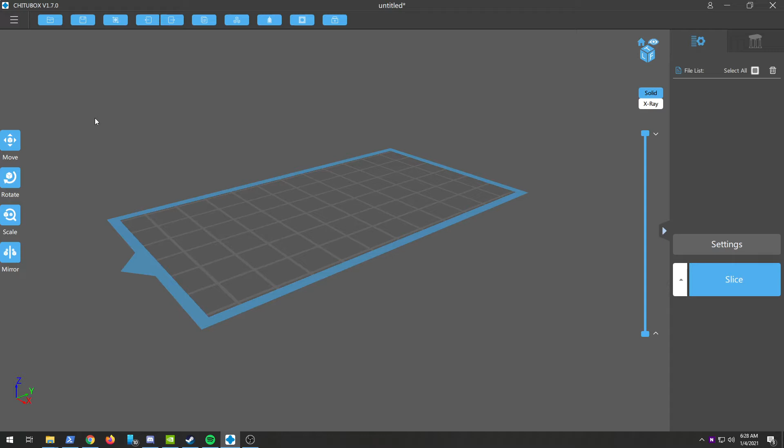Alright, I just got my LD-002R last week, so I'll run through the basics of this real quick about how to use it, what the basics are. So when you start, there is a newer version available than what is on the thumb drive that it comes with. It's 1.7.0 at the time. Go download that from their website. Both of them are going to have the LD-002R on there, but you know you want to have the newer versions of everything, right? So you fire it up for the first time.

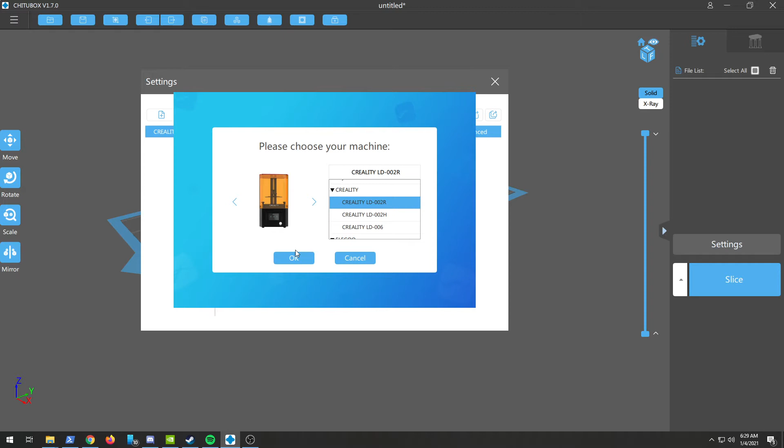You're going to need to go into settings and set up your printer profile. So we can either do that with settings here or settings right here. So it will have a generic printer under the profiles. We're just going to click remove printer, get rid of it, and then we're going to click add a new printer. We're going to come into this list and select the Creality LD-002R. Click OK. So that's going to create your printer in the settings.

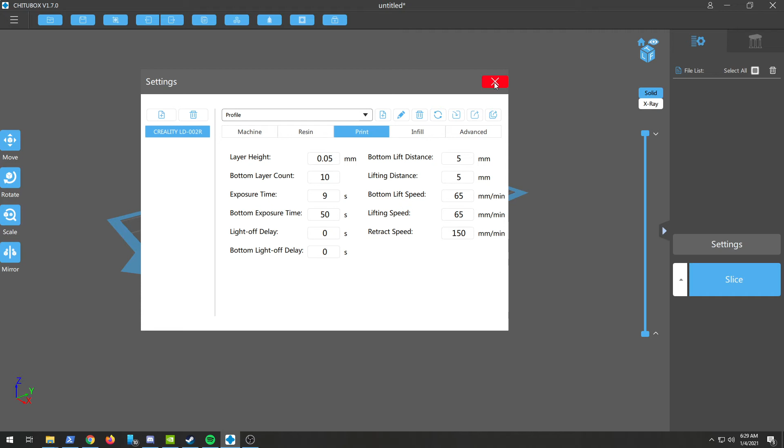It's going to give you your resolution for your screen. It's going to give the print size area for the build plate, general settings on resin. It's going to create the exposure times, the layer height, the lift distance, all these things that you don't want to tinker with. It's just set up by manufacturer's recommendations by default, so we leave it. So add your printer, you're ready to go.

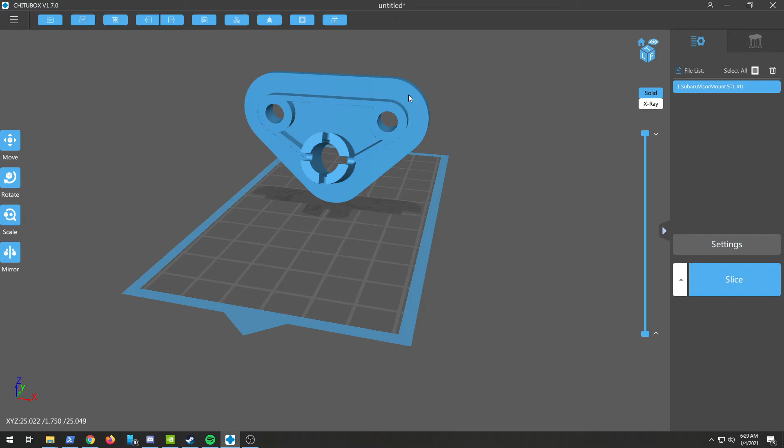Next, we're going to add that STL you've downloaded to your print area. In this case, I'm going to do this little Subaru visor mount right here. Click open. It's going to drop it on the area. Now, if it's too big as it sits, you'll see overhangs that will turn red where they're hanging off the build plate. You can just rotate it so that you get a better fit onto the plate. And I'm going to put this right here. And if you need to scale it, there is a scale to fit option that will just make it the right size.

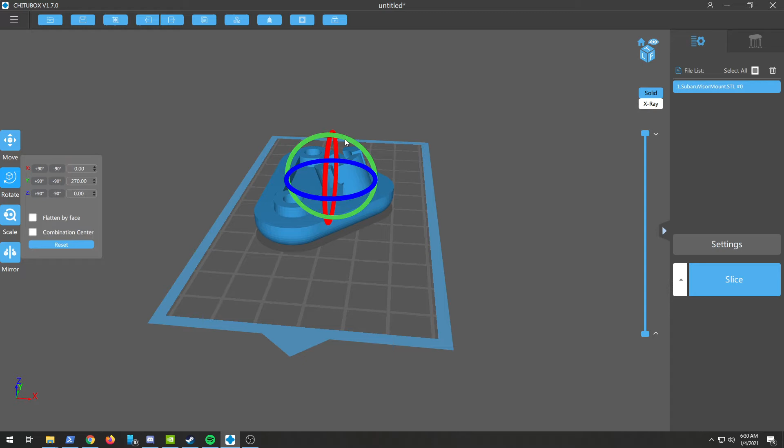So next, we're going to rotate it a little more. It's not great to print a big flat area on the resin printers because it will stick to the FEP film instead of to the build plate, and that's how you get a failed print when it breaks loose. So I'm going to take this and I'm going to rotate it up. They say about 30 degrees-ish or so, but I'm going to do it so that it fits pretty much even with the top of this line and that.

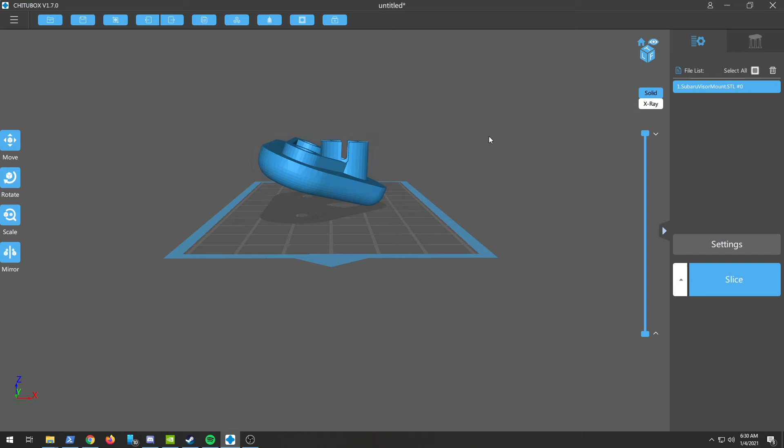Good. Okay, so resin printers do not do infill the way FDM printers and FDM slicers do. So this would be a dead solid piece if we print it as it is, and that's a waste of resin. You don't usually need to do that. So next, you're going to select your model and click up here on hollow. Set a wall thickness. I'm going to do 1.2 on this. Precision, whatever, I don't actually know what that does right now, and we're going to choose enter. And then when we click start, you'll see it run through the model and just dig out all the areas.

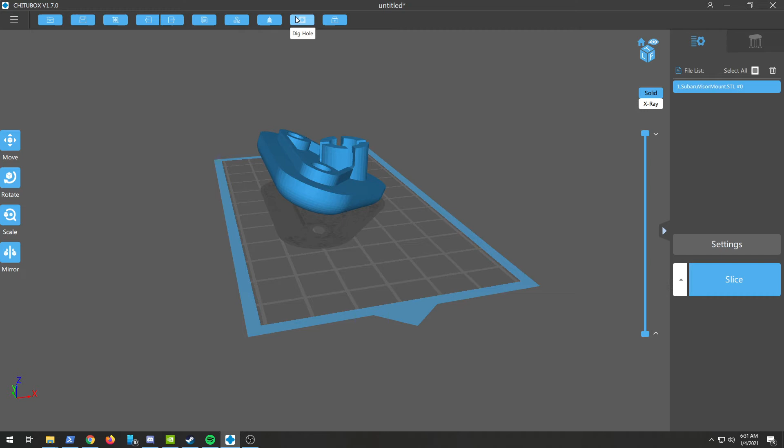Okay, so now it's hollow inside, and we need to have a way to let the resin out that's uncured and the alcohol when we wash it. So we're going to dig a hole. In this case, we'll click dig hole right here. It's going to be circle. I'm going to do 3 millimeters. I'm going to click add hole, and you'll see it turns into this little dot that you can move around.

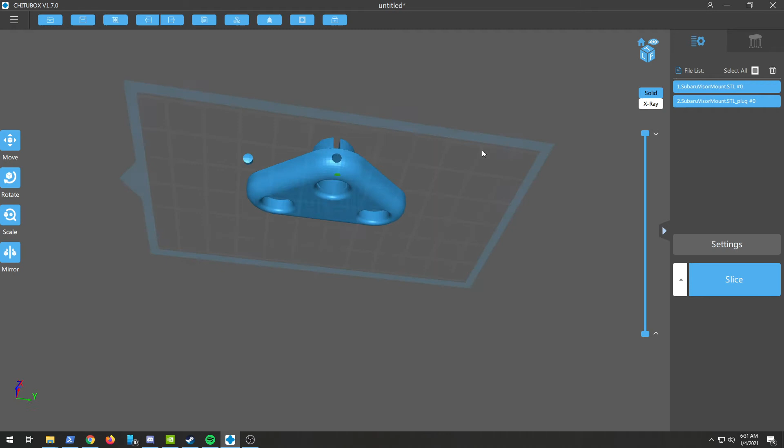So I'm going to try to put a hole right there. So I've now dug a hole out of my model. There's where resin can get out. I don't need this little fiddly bit right here, so I'm just going to click it and delete it. So now our model is hollowed and has a drainage port.

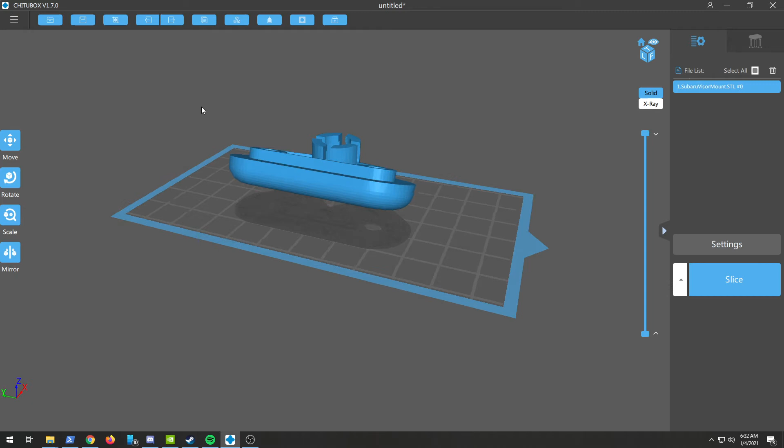You can add multiples. I'm not going to. This is going to be a finished part. I don't really want to do that with it and put holes all over it. But anytime something's hollow, you need to give it drainage.

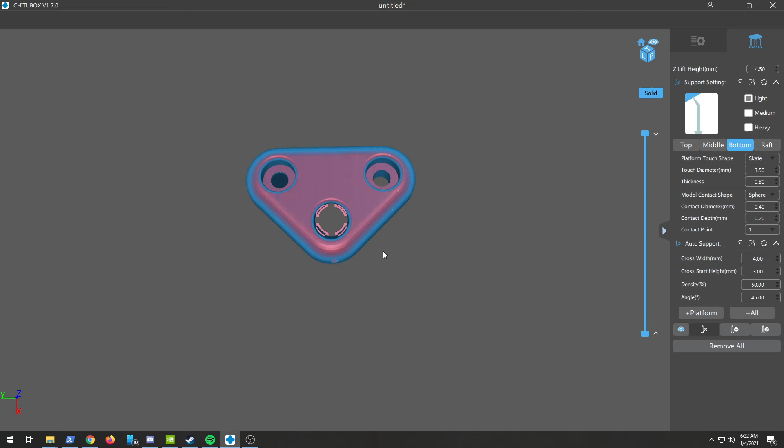So next step, we got it on our build plate. We got it sized. We got it rotated. We need to build supports. So come up here to the support menu, and you can add them manually, and some people do add them manually, but I'm not going to do that. So anything that's red means it is not touching the build plate, and it's going to need some type of support.

Here are the settings that have worked for me. So your Z lift height, I usually do between 3 and 4. I had it at 4.5 because I printed something that was small and fiddly, and it was causing the end to basically warp as it printed.

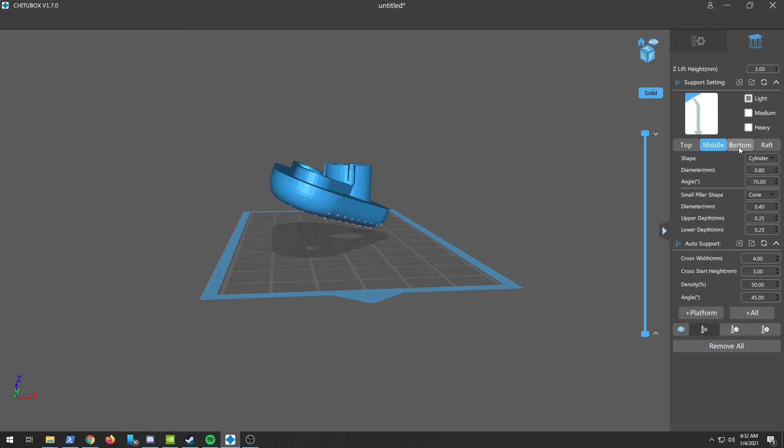So top, leave the contact shape as none, makes it break off easier. Middle is a cylinder, and then the bottom I do as a skate. And then I'm just going to click plus platform, and it builds us our nice little build platform to put it on. You've got nice positive fixture points on the build plate. It's going to break loose easily off of your finished piece, and we're done.

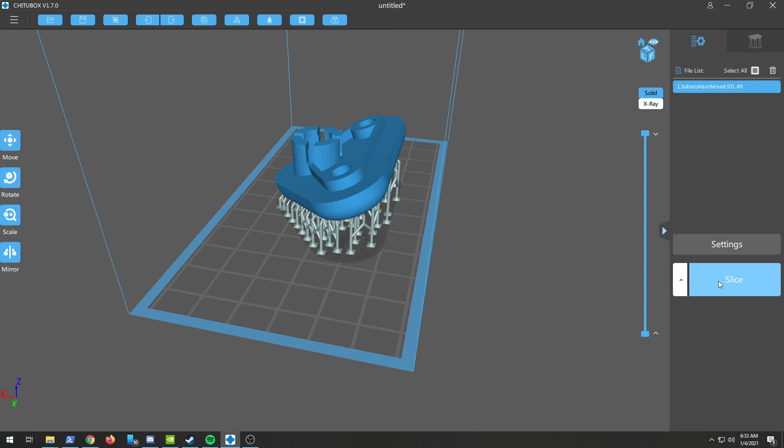All right. So now we're ready to slice. Click on the slice button. You only have one printer selected, so you don't have to worry about this little up arrow in the profiles. It's going to show you what your slicing is like, what volume of liquid is required, what the price is going to be, and then what your time is.

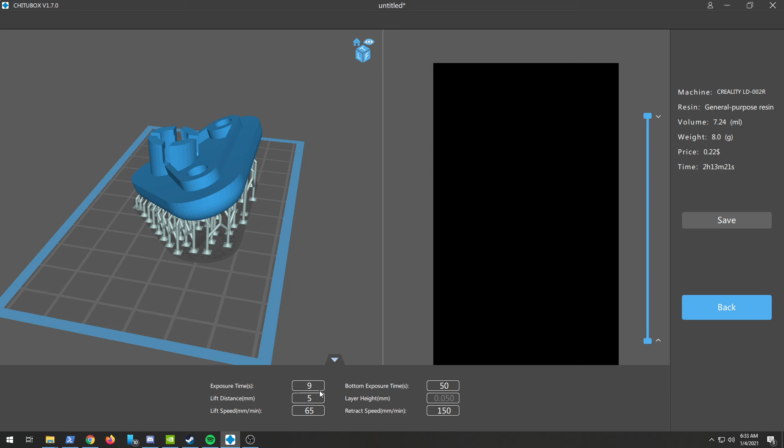Now you can bring this up in the bottom over here and change these settings based on a resin, but whatever the default is for your printer, which is probably going to be a 9-second exposure with a 50-second bottom exposure, that's probably right. You just leave that. And if you want to step through the build and look at it, you can.

All right. Now we're pretty much done. You got to click save. You give it a name. And then click save. It'll say writing file. Wait. And then once the file is done, it'll pop up and say open the folder. We want to open the folder.

We want to take this CTB file that we just created, copy it to our thumb drive, go put the thumb drive in your printer, fire it up, hit print, and you're good to go. Now, there are other things you'll want to do about leveling the bed. There are instructions with the machine about that, but basically, loosen 4 screws on the build plate, go to home position, hold it in place, tighten those 4 screws up, and it's leveled.

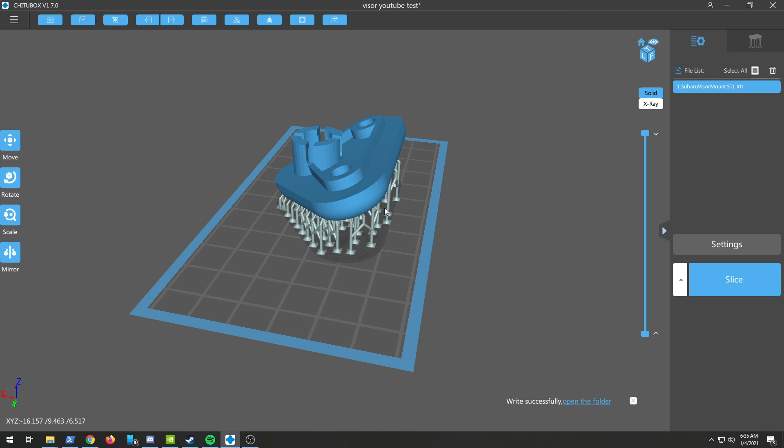And that's the basics of it. So you're not really creating STL files. Those are the models that you're going to download from somewhere else if you're not a designer and doing it yourself. You're just going to bring them into this Chitubox. You're going to put them on your build plate. You're going to slice them, and then they're ready to print. So hope you learned.